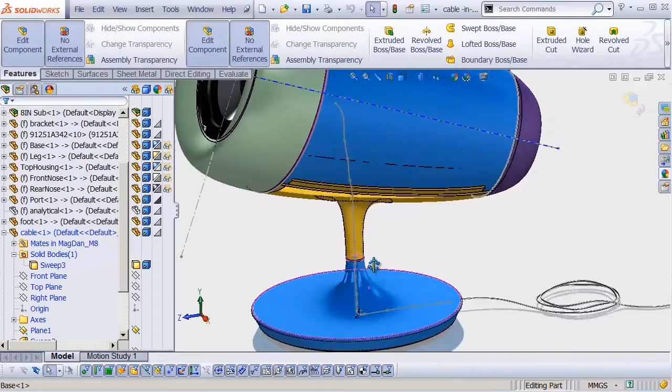This is going to be a heavily surface-based tutorial, but using a master model technique that's going to give us a lot of power and flexibility when putting together an entire assembly, using mechanical components as well as design components.

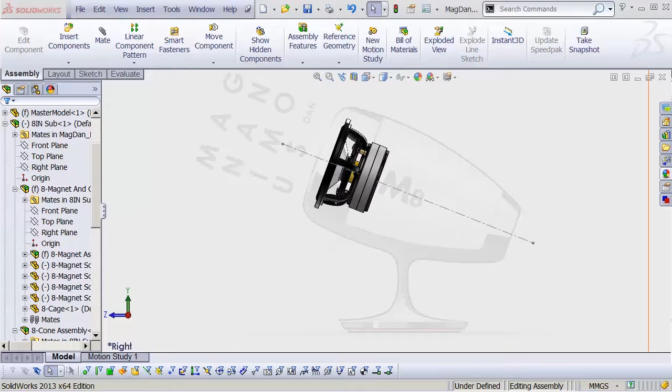Okay, now comes the really fun part. We get to actually start making some surfaces, and let's start with a really fun one. I'm going to grab the master model, open that up in its very own window. We don't need that speaker for the moment.

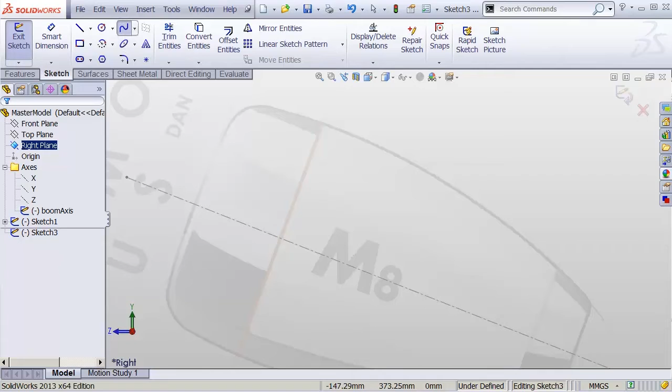I'm just going to create on the right plane a new sketch, make sure I'm looking normal to that sketch, and then grab my spline tool. I'm going to start something like right there, and then create a few points. Just something like so. It doesn't matter if it looks right, we're just going to get it close.

Something like that. See, the inside of this is going to form a port, and I kind of want that port to be all a part of this same continuous visual surface. But obviously that is one fugly curve. That is an ugly curve, and there's no bones about that.

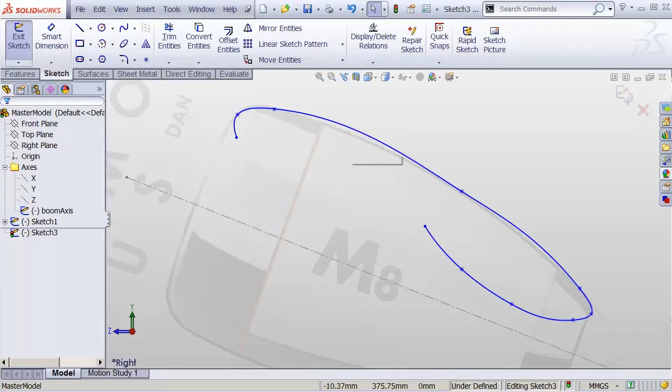Right-click on it, go down and show curvature comb so we can see just how wonky this thing really is. I'm going to set its density up pretty high, and then drag its scale down a little bit because that's a little bit excessive there. Hit OK, and now we can at least see how wonky our curve is.

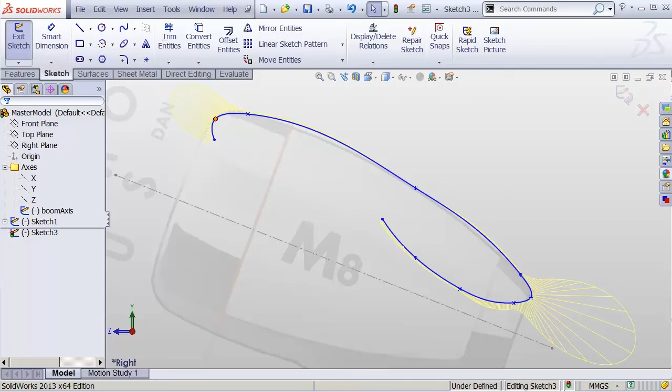If you're not used to reading a curvature comb, the combs get longer based on how tight the radius is at a given point. So a tighter radius means more curvature, or a longer spine. Basically it allows us to magnify the curvature of our curve, making it a little easier to see what's going on.

So I'm going to right-click this again and go down to Display Control Polygon, and that's just going to make it a little bit easier for us to control this curve by moving these points around until we're happy with the overall shape of the curve. This is kind of an eyeballing process, but that's just the way it is.

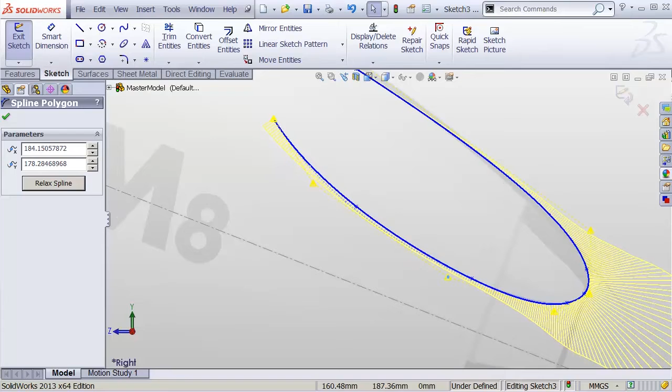Now this is going to look very similar to making a NURBS curve in something like Alias or Rhino, but this is not a NURBS curve. In fact, these handles are not real NURBS handles. It's an interpolated spline, and they are adding NURBS-like control handles to it to make it feel familiar and controllable to people like you and me who are used to working in something like Rhino, even though in reality the spline is still a standard through-point engineering spline.

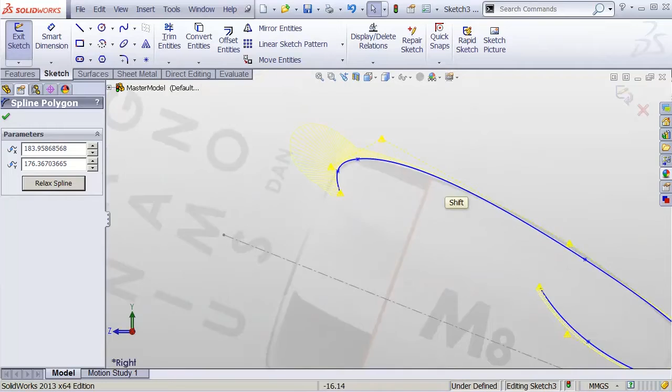I actually really hate that about this spline tool. I wish they would give us a normal NURBS spline, but there you have it. This is what we have in SolidWorks.

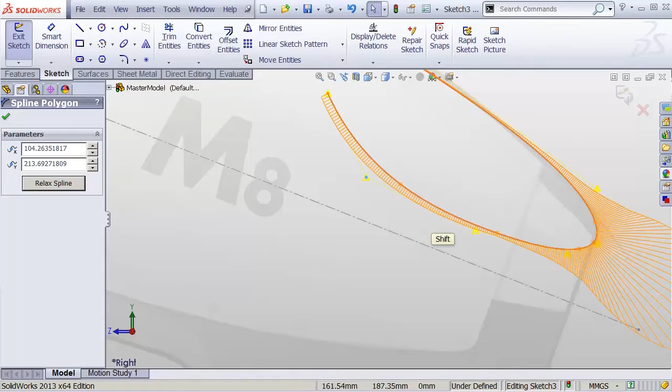Essentially this inner part is going to be kind of shaped like a horn in a way. This is going to be the port coming out the back, and the reason we shape it that way is to relax the air coming through so you don't hear port noise as the air flies in and out of there.

Okay, so I'll exit that, and let's go ahead and just create a surface from this. We'll go to our Surfaces tab, we'll do a revolved surface, and we want to revolve it around that center axis.

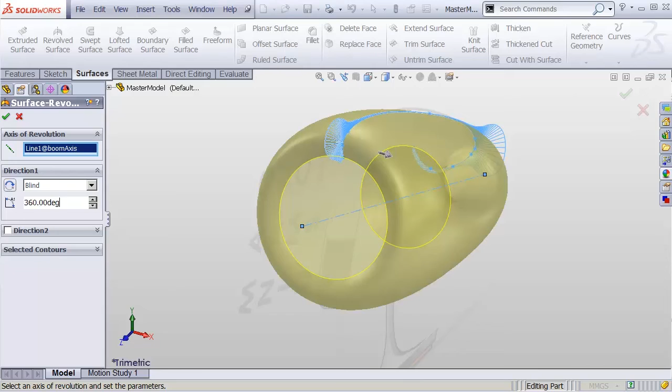We only need to go 180 degrees, and if it's going the wrong way, you can flip the direction. But I do want it on this side. Hit OK, now I have a surface. Now, the surface, when in its opaque form like that, is a little bit hard to read, so let's actually fix that before we jump back to our assembly.